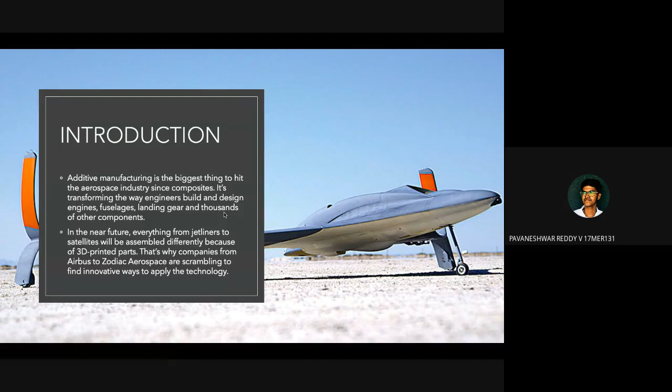The global additive manufacturing market reached 3.5 billion by 2017, and aerospace and defense represents over 10% of the global additive manufacturing market. Aerospace is leading the way in adopting additive manufacturing among manufacturing industries.

Additive manufacturing allows aerospace manufacturers to quickly and cost-effectively produce highly customizable geometrical components, quickly reproduce replacement parts, and modify current designs for increased performance.

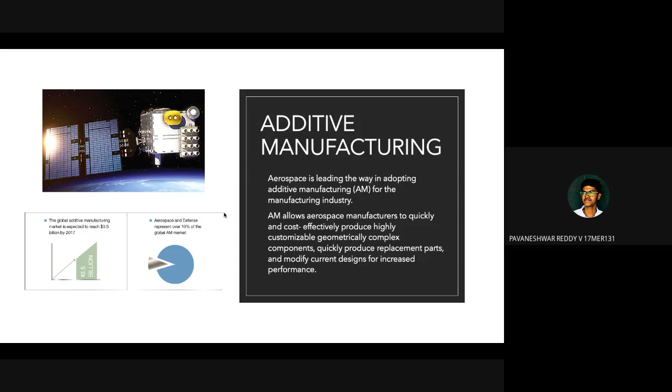Industries are mainly aiming for process quality control and post-process inspections, material development, heat treatment development, engineering design, and larger and faster machines. This additive manufacturing helps industries through weight saving, space optimization, structural optimization, and reduced joining components.

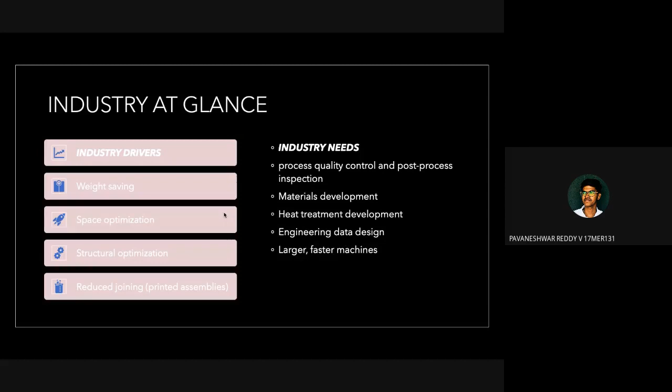Next, Pratap. Good morning to all. Growing demands: aerospace manufacturers have mostly been using 3D printing for prototyping applications. As technologies improved in recent years, this trend is expected to continue over the next 10 years.

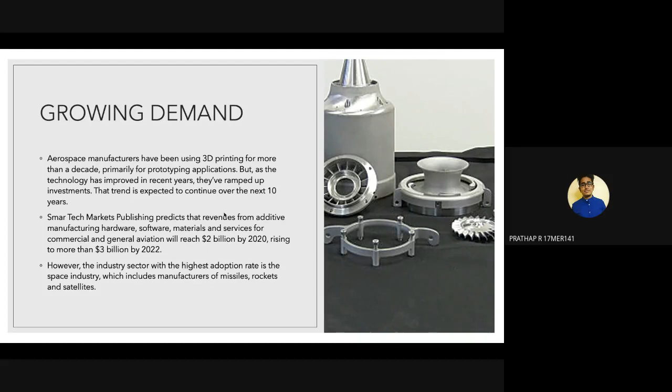SmarTech Markets, publishing revenues from additive manufacturing hardware, software, materials, and services for commercial and general aviation, projects this will reach $2 billion within the year 2020, rising to more than $3 billion by 2022. However, in the industry sector, the highest adoption rate is in space manufacturing of missiles, rockets, and satellites.

No matter what aerospace component is to be printed, engineers must redesign parts and rethink critical issues such as joint designs. Some CEOs of leading aerospace companies have said the following regarding tools for additive manufacturing: engineers should rethink their designs, as additive manufacturing requires an entire engineering overhaul.

You are not taking advantage of the technology when you take a machined or cast part and simply replicate it with 3D printing. The biggest challenge of additive manufacturing is controlling the material properties and strength of the parts, says Campbell.

The consistency of parts will vary. This is the biggest hurdle to adopting this technology for aerospace applications, where part failure is not an option.

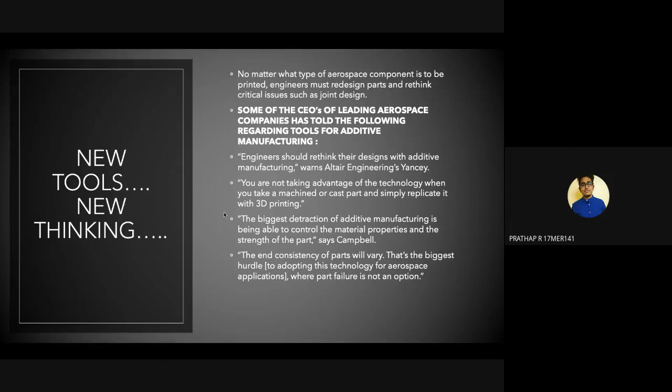Additive processes: in the aerospace industry, engineers are using several different additive manufacturing processes to turn their ideas into reality. DMLS, electron beam additive manufacturing (EBM), FDM, SLM, and SLS are all used in aerospace engineering.

DMLS fuses powdered metal and alloy materials with a high-wattage laser to produce parts, producing results comparable to machined or cast materials. EBM is favored by many aerospace manufacturers for niche parts using Inconel, tantalum, titanium, and other high-value metals.

FDM is employed for thermoplastics. Almost any size can be produced, and there is no predetermined space that poses restrictions. On the material side...

Engineers have several options for direct metal printing, including aluminum alloys, cobalt chrome alloys, nickel superalloys such as IN718 and IN625, and titanium alloys such as Ti-6Al-4V. New materials are coming soon, such as tungsten. Thank you.

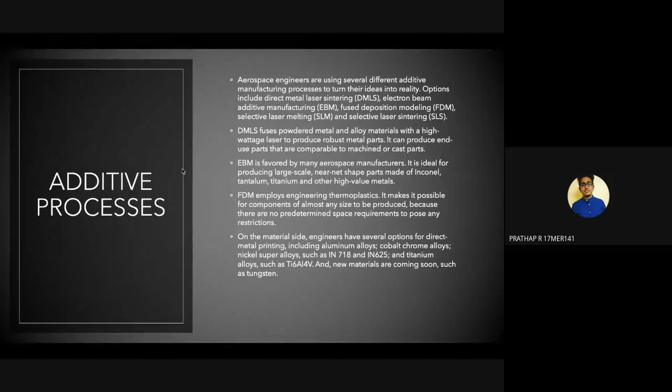Aerospace applications: some major updates regarding this have been in UAVs and unmanned programs. Recently, Aurora Flight Sciences Corporation unveiled a jet-powered unmanned aerial vehicle that uses 3D printing for about 80% of its design and manufacture, weighing around 33 pounds.

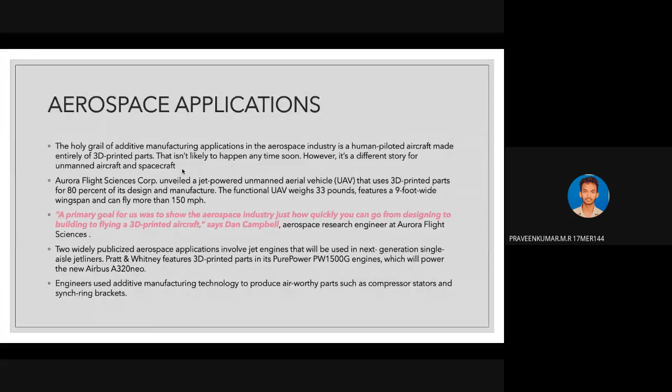This is how much it has developed regarding 3D printing in aerospace.

NASA has also tried additive manufacturing to rebuild the injector fuel nozzle that will be used in the Space Launch Systems program in the upcoming years.

We can expect by 2021 this type of model that is purely made up of 3D printing.

Thanks to 3D printing technology, which builds about 15 times faster than the traditional manufacturing process, this helps in reducing time and improving efficiency for the employees at NASA.

Not only NASA, Aerojet Rocketdyne recently produced 12 additively manufactured production nozzle extensions for use aboard the Orion spacecraft that will one day take humans to Mars.

This is a future project, expected to be a collaboration with SpaceX and NASA, with these companies acting as third-party suppliers to these branches.

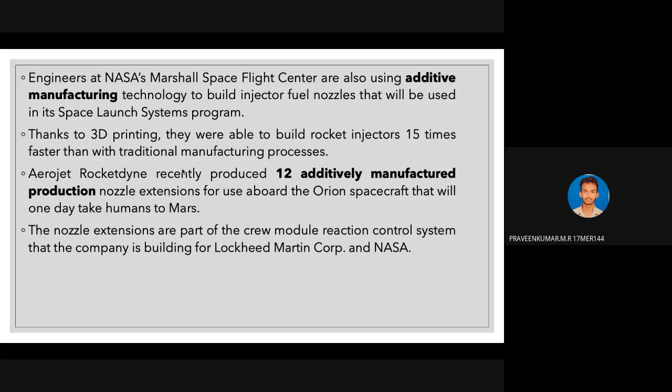So how can the aerospace industry really benefit from ALM? ALM is nothing but additive layer manufacturing, which is a way to overcome these challenges. ALM has come a long way since its early development 30 years ago.

The most widespread additive layer manufacturing process for industrial applications builds large parts layer-wise on a powder bed, selectively melting powder particles by means of a laser or electron beam.

ALM offers various advantages in the aerospace industry as well. One is a shorter development process and time to market, which allows rapid prototyping and conceptual design review and validation.

This enables engineers to test multiple configurations and customer preferences, minimizing product launch risk.

The next one is freedom to design complex geometry. This is like a future update not yet implemented now, where we can expect near net shape parts that allow increased design complexity without inflating manufacturing cost.

This is doubtlessly the main advantage of the technique for aerospace, given several key considerations: maximum performance, consolidated design, and improved reliability, to achieve lightweight construction and improved fuel efficiency.

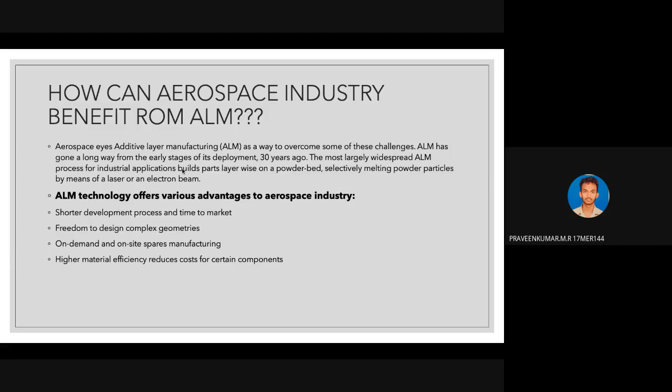So, thank you for your comments on our PPT, sir.

As we see in the history of 3D printing, aviation was the first industry to invest a large amount into 3D printing, as the aerospace industry.

They started in the 1980s itself, with both aviation and space flight adopting the technology because they need it in a major role more than any other industries.

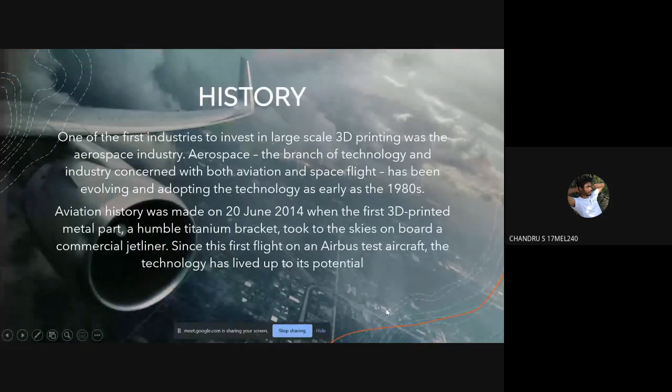Importance of 3D printing in aviation. Why is 3D printing important in aviation industries? Because there are solid parts in traditional manufacturing. Many solid parts cause major weight in aircrafts, and they need to reduce the weight. Because of weight, there is more fuel consumption, so they need to reduce fuel and also CO2 emissions. That's why they are using 3D printing.

In 3D printing, there are no solid parts. Instead there are hollow parts and typical engineering structures. This also increases the lifespan of the aircraft through 3D printed objects, using 55% less weight while reducing raw material used by 90%. By reducing material while making different engineering parts through 3D printing, we can also increase the stiffness and strength of the parts.

Decarbonization means reducing carbon dioxide in the atmosphere. By using 3D printed parts, we can reduce fuel consumption and material usage, helping achieve decarbonization through 3D printing in aviation industries.

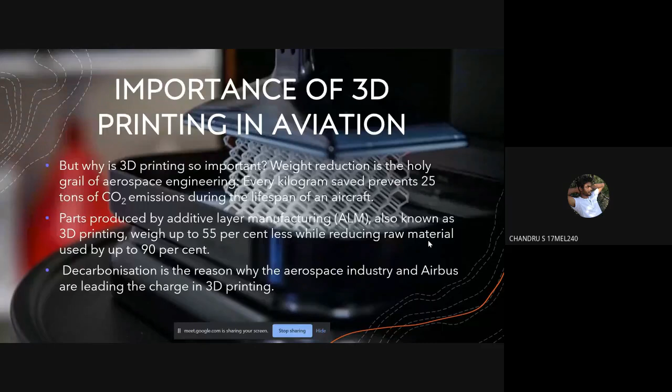Airbus has been using 3D printing, and because of that they are rapidly expanding their field into this technology. By 2050, Airbus has planned, through their Innovation 2050 program, to build a fully 3D printed aircraft. This is some of the information they have shared.

In the aerospace and 3D printing market, Airbus has joined the race for additive manufacturing. As I said, they started late in 3D printing, but they are now rapidly moving into this field because there are many useful benefits in 3D printing materials, and they can reduce costs. So they have started many programs in 3D printing.

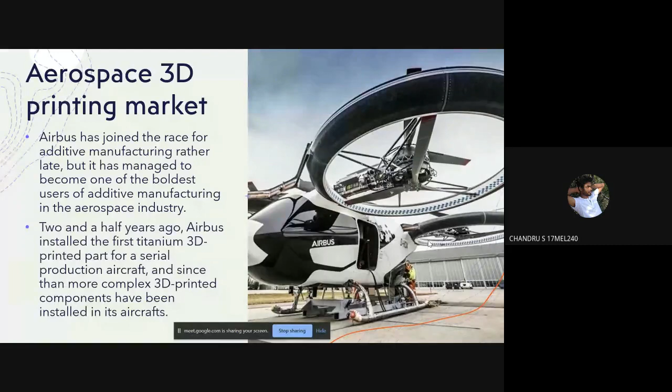As we can see, Airbus created in additive manufacturing the aerospace industry's first titanium 3D printed part for a serial production aircraft. More complex 3D printed components have since been installed in its aircraft.

3D printing in aerospace: the aerospace industry continuously pursues improvement in efficiency of aircraft and reduction in air pollution. Because of 3D printing, we can reduce air pollution and achieve significant weight reduction. Aerospace industries are also characterized by the use of highly complex parts, which we can produce using 3D printing.

High unit cost means we don't need to produce a high quantity. We need quality products with a lower quantity in the aerospace industry. That's what 3D printing gives us - a smaller number of high quality products, highly suitable for utilization of 3D printing techniques.

The aerospace industry is highly suitable for 3D printing, more than other industries, because aerospace needs a very small number of parts, but they need to be highly qualified, strong, and stiff. Many other factors are also involved.

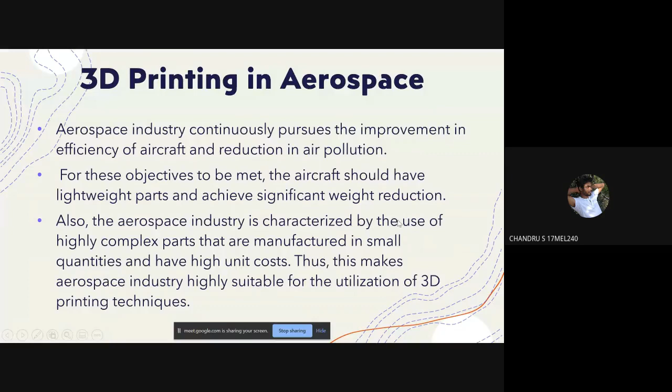3D printing aircraft parts: Boeing has already used 300 different 3D printed parts in its aircraft. Not only Boeing, but many other companies are also using this technology. I have shared one example: one such component is the duct.

We all know that ducts carry cool air to various electronic equipment in an aircraft. Some of these ducts have complicated shapes and had to be assembled from several different pieces, which increases labor cost and manufacturing cost because it's difficult to manufacture. But with 3D printing, you can easily manufacture that at a lesser cost - reducing cost by 25% to 50% per part.

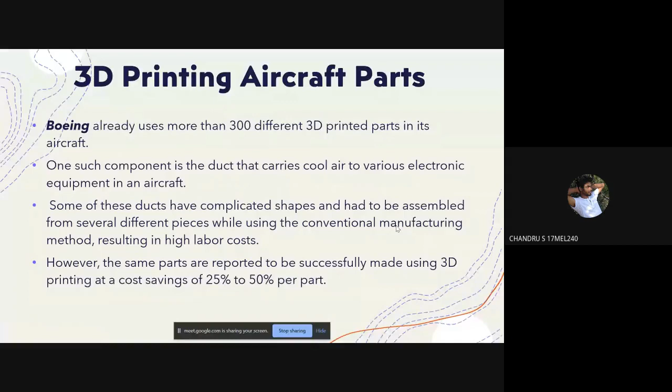Good morning, sir. I am presenting a continuation on aviation, bridging the gap with 3D printing. First, the 3D printed spacer panel painting.

This paint job is done in an aircraft, the Airbus A320. This is the first 3D printed part that can be seen by a passenger inside.

Next, the 3D printed spacer panel. While the 3D printed part is integrated with the aircraft, the end gaps are filled with the storage overhead component. It will be installed first in the public passengers' view.

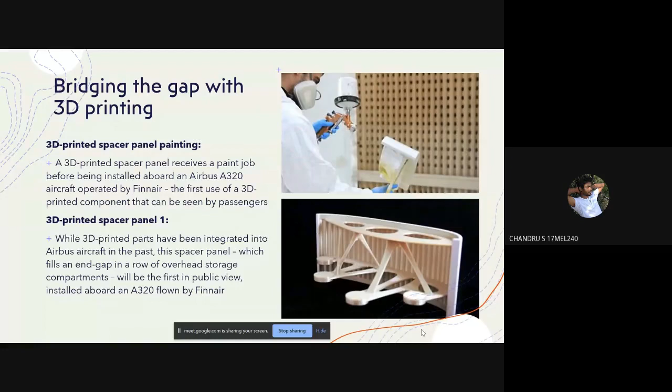First, they produced the 3D printed spacer panel in the A320 aircraft. New plastics are used by this injection molding method to produce this complex procedure for low volumes.

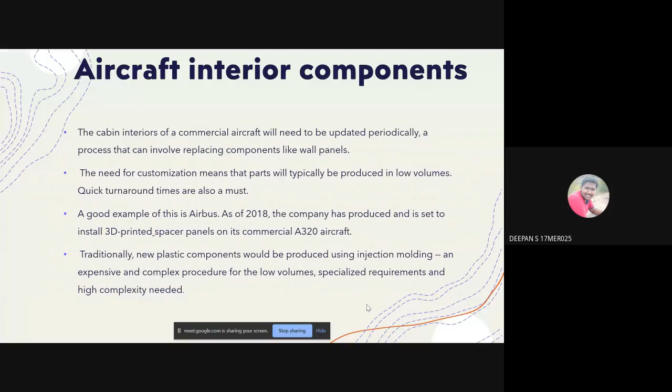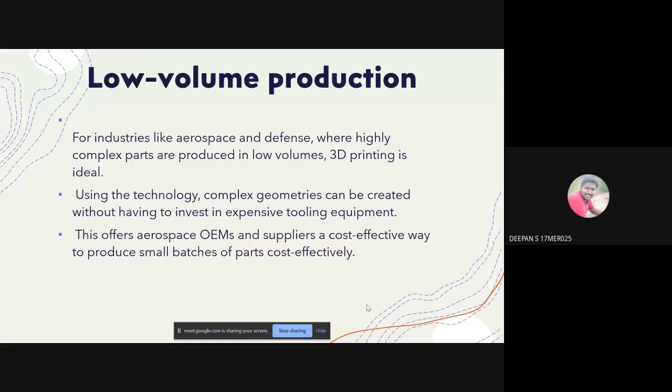Weight reduction. Alongside aerodynamics or engine performance, weight is the most important factor considered in the design. While reducing weight, fuel efficiency and carbon dioxide emission are controlled, and payload can also be controlled. By using 3D printing technology, creating a lighter component results in fuel savings. The optimization through generative design software produces an increase in product complexity, almost limitless.

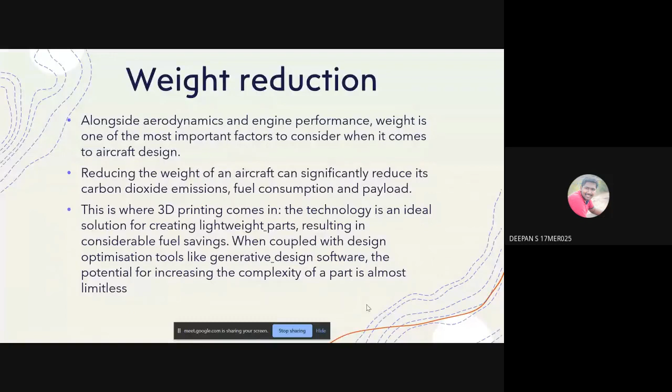This is an example used in an aircraft: a bracket used in the landing gear sensor. While conventional and additive manufacturing design are compared, additive reduces weight by 29% but increases stiffness by 100%. We are using this in the aircraft landing sensor.

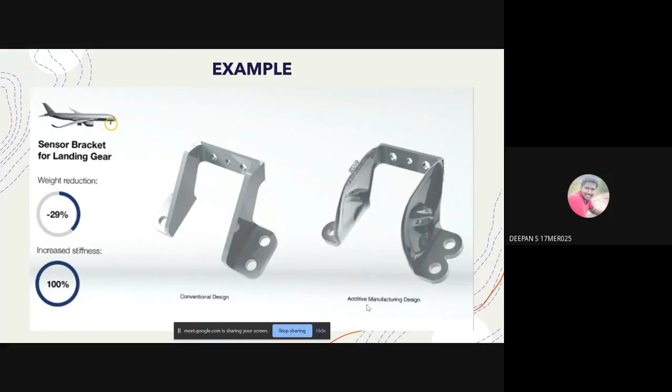Material efficiency. As you know, 3D printing is a type of additive manufacturing technology, so less wastage happens than with traditional subtractive methods. The materials used in aerospace 3D printing range from engineering grade thermoplastics like Ultem 9085, Ultem 1010, PAEK, and reinforced nylon, to metal powders like high performance alloys, titanium, aluminum, and stainless steel.

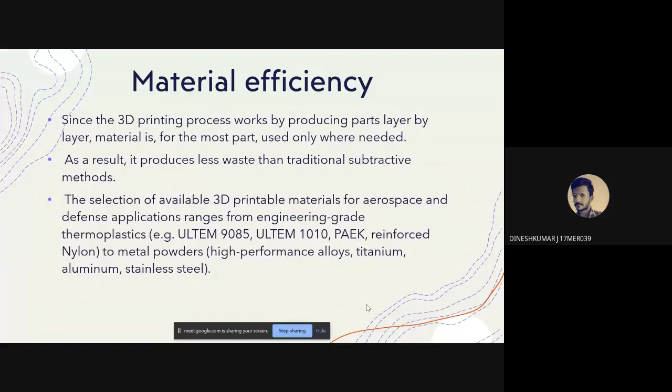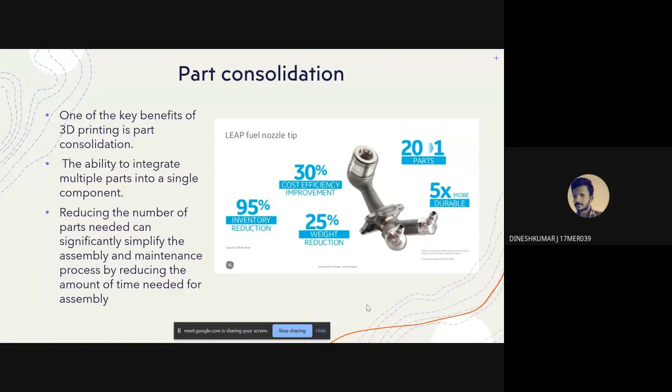Part consolidation. One of the main key benefits of 3D printing is part consolidation. It has the ability to integrate multiple parts into a single component. The reduced number of parts needed can significantly simplify the assembly and maintenance process by reducing the time needed for assembly.

Maintenance and repair: the average lifespan of an aircraft ranges from 20 to 30 years, making maintenance, repair, and overhaul an important function in the industry. Metal 3D printing technologies like direct energy deposition are commonly used to repair aerospace and military equipment. Turbine blades and other high-end equipment can also be restored and repaired by adding material to worn-out surfaces.

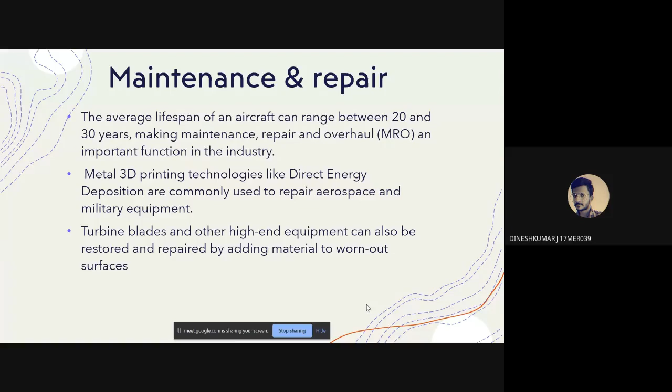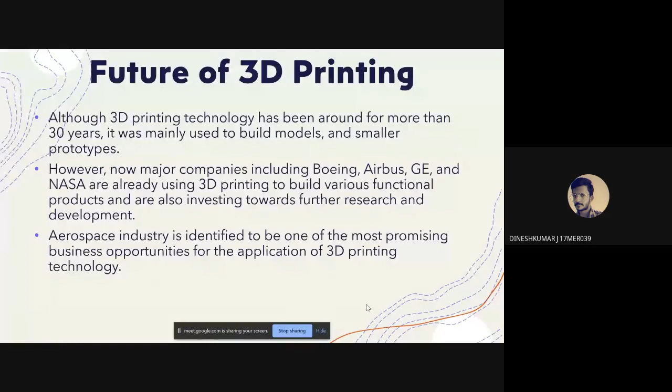And at last, as we said earlier, nowadays 3D printing technology is only used to produce small parts in aerospace. We really don't know when we will be able to see an aircraft fully produced by 3D printing technologies, but we can expect this development within this decade. Thank you.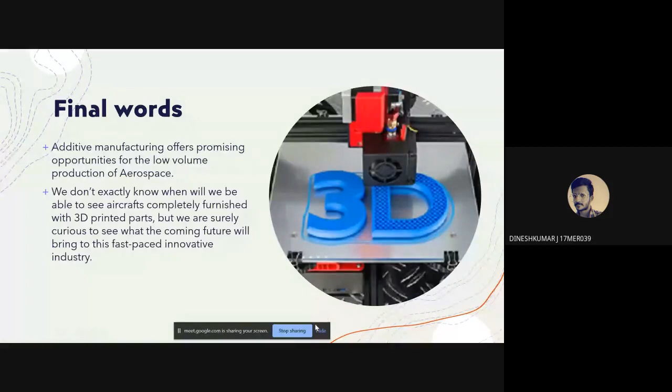Nice presentation, man. Next batch. Sir, yes sir. Sir, is it visible, sir? Hello, sir. Sir, it is visible, sir. Hello, sir. Start, man. Sir, is it visible, sir?

Good morning, everyone. Today we are here to present additive manufacturing application domains in electronics. Myself, P. Hariharan. My batchmates are M. Hariharan and D. Hariprasad.

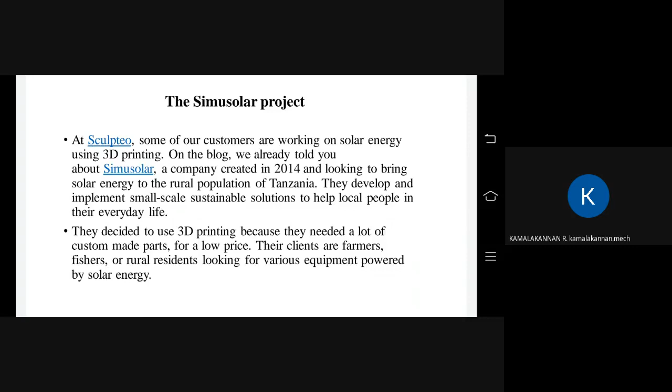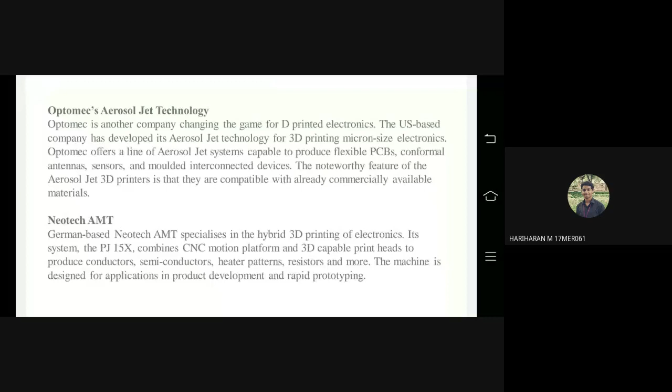The technology behind aerosol jet enables printing interconnects on both 2D and 3D substrates. For 2D applications, multi-level interconnects can be created by printing a dielectric material at the circuit crossover point. This ensures eliminating a multi-layer circuit board but keeping a single layer. This can be accomplished because aerosol jet processing supports multi-ink input devices, allowing material to be switched or even blended during printing.

Also, aerosol jet can print conformal interconnects on 3D surfaces, eliminating the need for wire bonding. For example, printing electrical connections on 3D stacked die or for LED chip fabrication.

Aerosol jet technology enables 3D printing of electronics. Electrical components such as resistors, capacitors, antennas, sensors, and thin film transistors have all been printed with aerosol jet technology. For example, the ohm value of resistors can be controlled through printing parameters. Components can also be printed onto three-dimensional surfaces, eliminating the need for substrates.

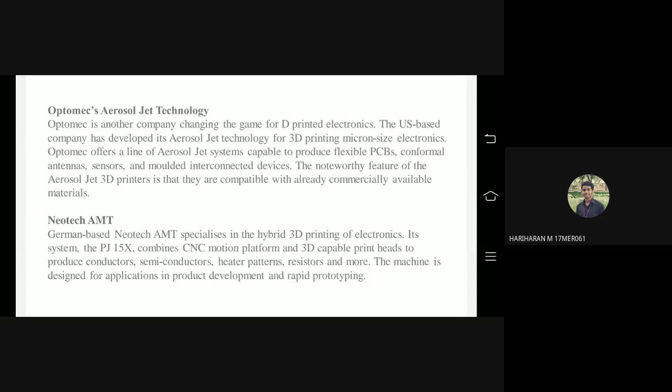Next, Neotech AMT. The German based company Neotech AMT specializes in hybrid 3D printing of electronics. Its system, the PJ15X, combines a CNC motion platform and 3D capable print head to produce conductors, semiconductors, heater patterns, resistors, and more. The machine is designed for applications in product development and rapid prototyping.

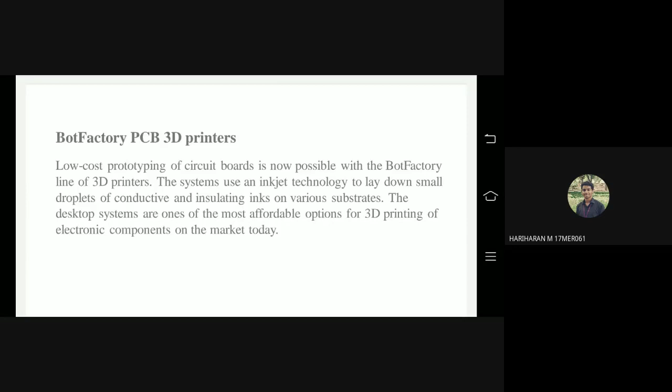Bot Factory PCB 3D printers. Low cost prototyping of circuit boards is now possible with the Bot Factory line of 3D printers. The system uses inkjet technology to lay down small droplets of conductive and insulating inks on various substrates. These desktop systems are among the most affordable options for 3D printing of electronic components on the market today.

Here are some of the benefits of 3D printing electronics. First, we will talk about in-house prototyping. In an industry as competitive as electronics, the demand for smaller, thinner devices with improved functionality is inevitable. However, developing a prototype of a printed circuit board is challenging.

Generally, printed circuit boards are formed by layer by layer formation. We know that 3D printers make products in layer by layer formation, which gives flexibility to the product. The core of any electronic device and other electronic parts is often challenging, and this task is very often outsourced. This typically results in prolonged lead times, and outsourcing can also be coupled with intellectual property concerns. However, the advent of 3D printing means that creating prototypes of circuits and circuit boards can move in-house.

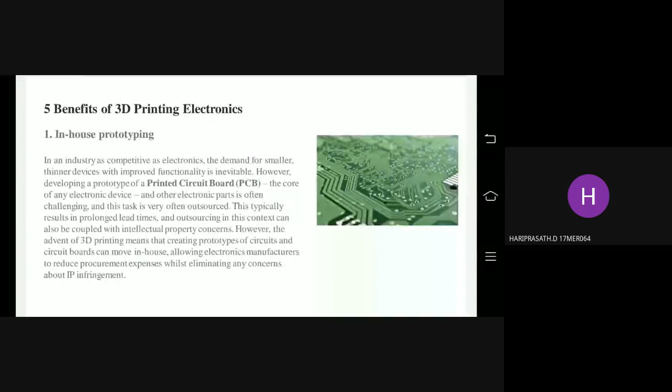This allows electronic manufacturers to reduce procurement expenses, which are nothing but purchasing expenses. These can be reduced through in-house prototyping, while eliminating any concerns about IP infringement, which is intellectual property infringement. Intellectual property means we can avoid copyright problems. If we create a product, others cannot copy it, like a patent. This intellectual property aspect is inherent in 3D printed electronics.

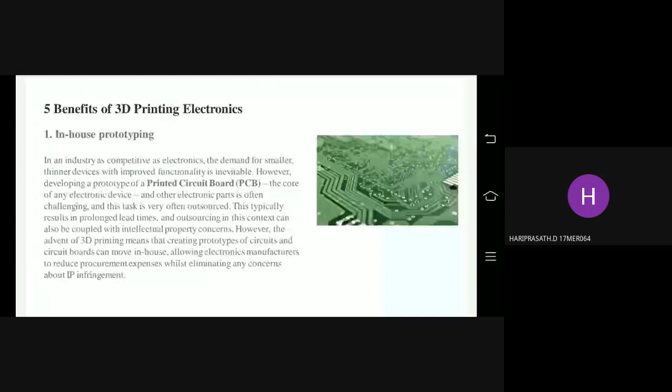Faster time to market. Producing prototypes in-house can create efficiencies during the product design stages. 3D printing enables a faster turnaround of design iterations, speeding up the design validation stage. By developing products much faster, electronic manufacturers gain a competitive advantage and achieve more flexible manufacturing.

Design flexibility. 3D printing opens opportunity to design complex shapes and components. Normally, some complex products cannot be formed by traditional manufacturing, but such products can be made by 3D printers. For example, multi-layered circuits can now be 3D printed on flat, non-flat, and flexible surfaces, which would not be possible with traditional manufacturing techniques. With some other subtractive manufacturing techniques, certain critical products cannot be formed, but those products can be easily formed in 3D printers.

3D printing also enables engineers to design for functionality instead of manufacturability, meaning complex structures with embedded electronics. Here, embedded electronics is nothing but a system with both hardware and software, and such advanced products are made by 3D printers. It also enables encapsulated sensors, which is nothing but a product that protects the sensor from the environment. For example, an embedded RTD sensor, and antennas can be more readily produced.

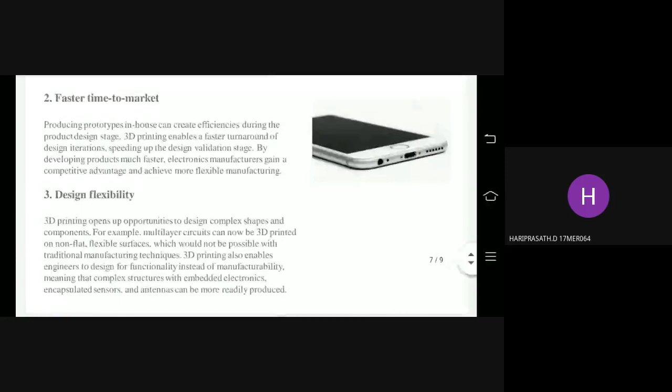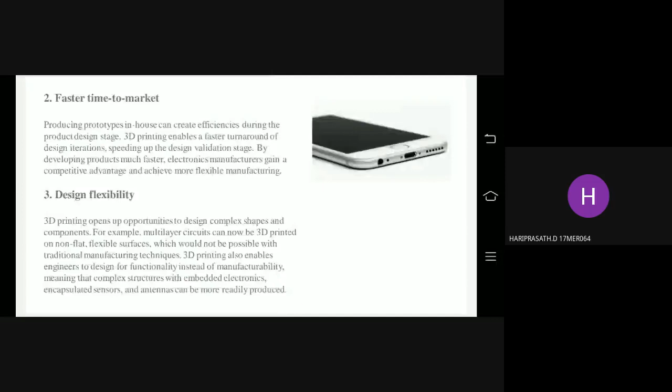In flexibility, nowadays batteries are made using 3D printers, such as zinc air batteries. They use multi-materials like polymers, metals, ceramics, and composites.

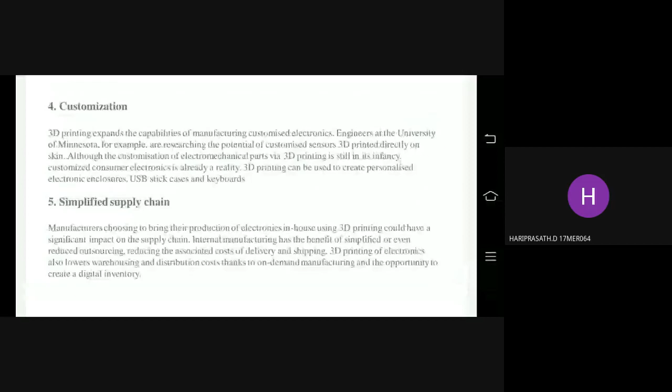Customization. 3D printing expands the capabilities of manufacturing customized electronics. Engineers at the University of Minnesota, for example, are researching the potential of customized sensors and 3D printing directly on skin. This 3D printing technology is also used in many fields of medicine, although the customization of electromechanical parts via 3D printing is still in its infancy.

Customized consumer electronics is already a reality. 3D printing can be used to create personalized electronic enclosures, USB stick cases, and keyboards. Some personal products can also be made using 3D printing.

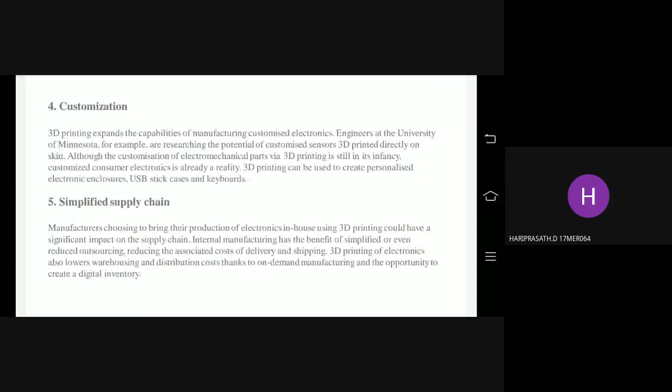Simplified supply chain. Manufacturers choosing to bring their production of electronics in-house using 3D printing could have a significant impact on the supply chain. Internal manufacturing has the benefit of simplified or even reduced outsourcing, reducing the associated cost of delivery and shipping. 3D printing of electronics also lowers warehousing and distribution costs, thanks to on-demand manufacturing and the opportunity to create a digital inventory.

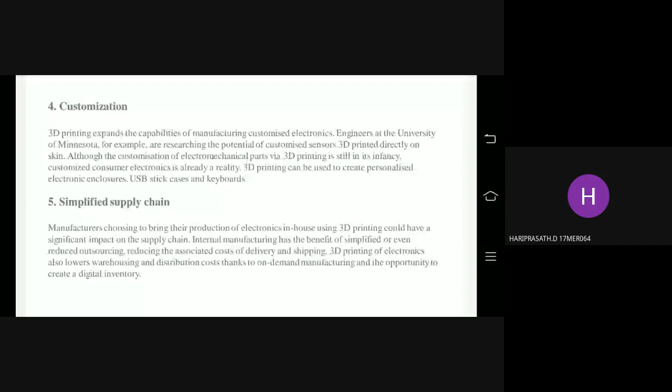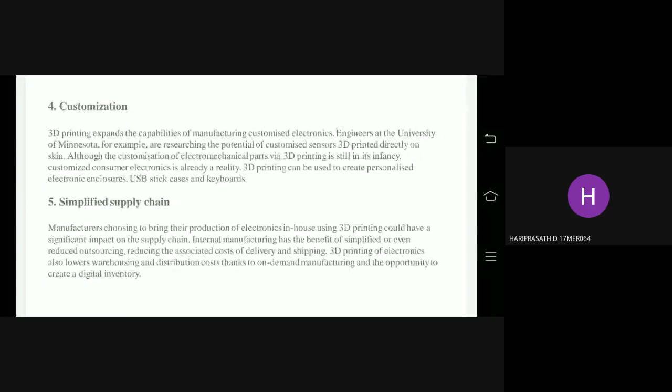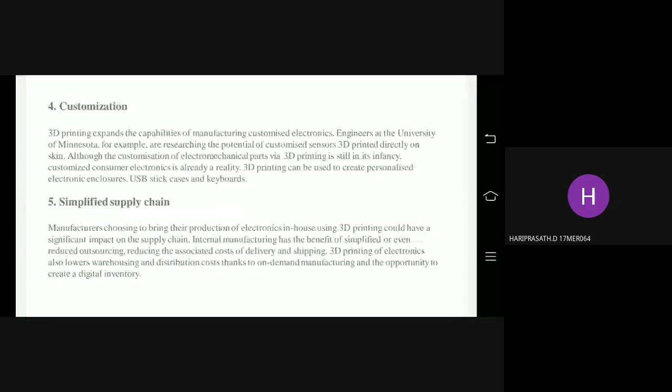We can make some complex products as simple products, created using 3D printing in the home itself. In such cases, there's no need to buy the product from somewhere else, another state or country. Mostly, products bought from far away include travel cost, which increases the price. To avoid this, we can make such smaller components at home itself, which can reduce the demand for manufacturing components elsewhere.

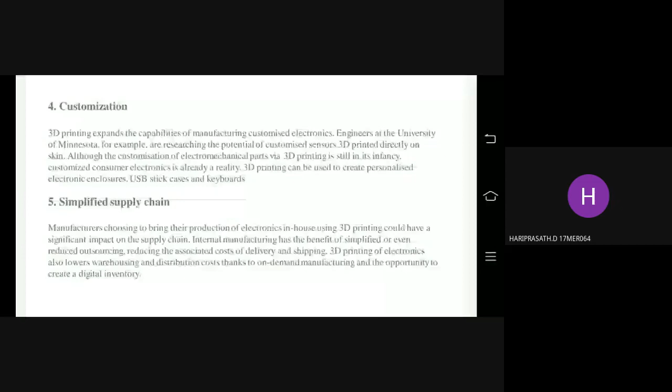Finally, conductive 3D printing offers new opportunities because conductive 3D printing is useful in IoT projects. This innovative technology is used to produce 3D printed devices like LEDs, touch sensors, etc. It is also used to produce bigger projects in soft robotics, 3D electronics, and communication devices such as 3D printed near field communication antennas.

And finally, the future of 3D printing in the electronics industry could allow us to create fully functional smartphones or multi-material products using additive manufacturing, if these ideas are developed in the future.